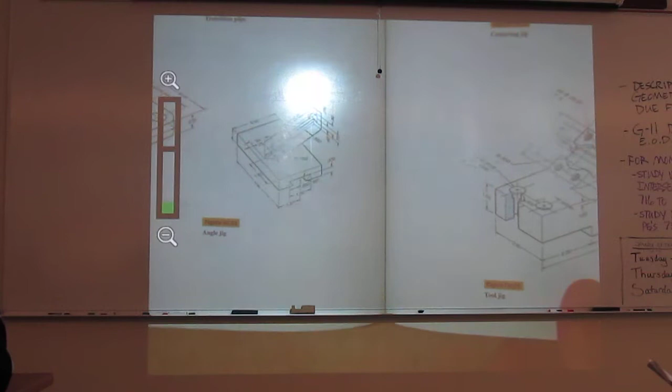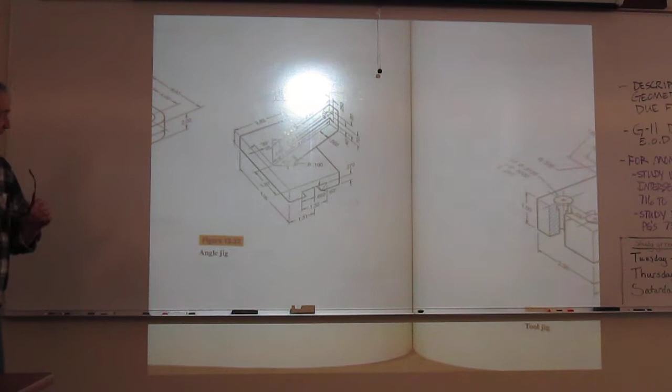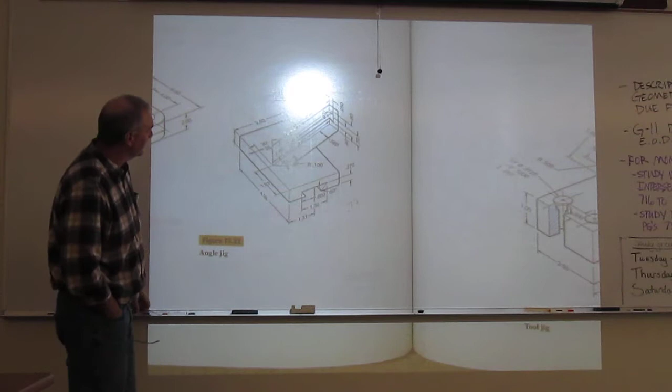A couple things about the object. First off, this dimension right here for the height of this guy is given, kind of hard to see, there's like a little 75 right in here. Is that right? I can't see it at all. We got a glare going from that window over there. Okay. Anyway, this is 0.75 high.

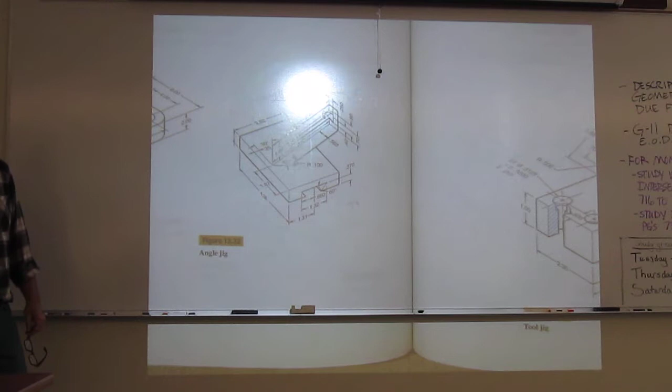Now, the thing you gotta figure out with this guy is where you're gonna pick your front view, because you can choose a lot of different things. If you pick like this or this, where I'm looking perpendicular to these faces, then orthographic projection is going to do a great job on this base. It's going to totally describe the whole thing. But then the top piece is all oblique. In fact, well, it's inclined and oblique.

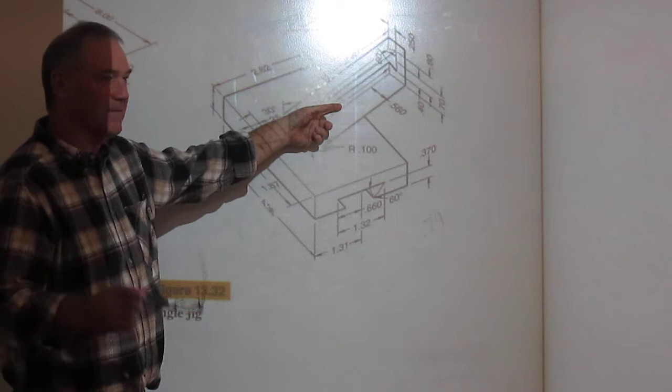If you decide, well, I'm going to look at it like here because I want this true size and shape, and I choose that for my view, orthographic projection again would do a great job now describing the top. The bottom's now all oblique. So you got to make a choice.

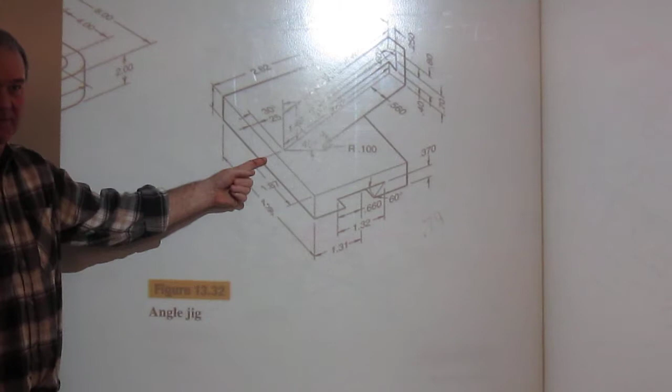I chose this for my front just because I figure this is a base, it's a stand, looks like it slides over some device to hold it. This is probably the bottom, how it runs in production. That's the only reason I chose that. You can choose a variety. So I chose here. That does a great job on the base. The problem is, this is all oblique.

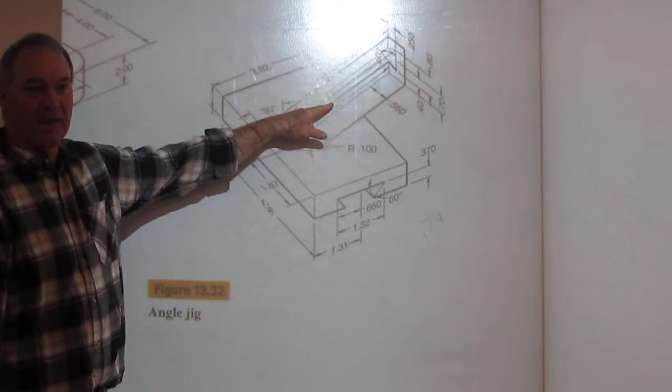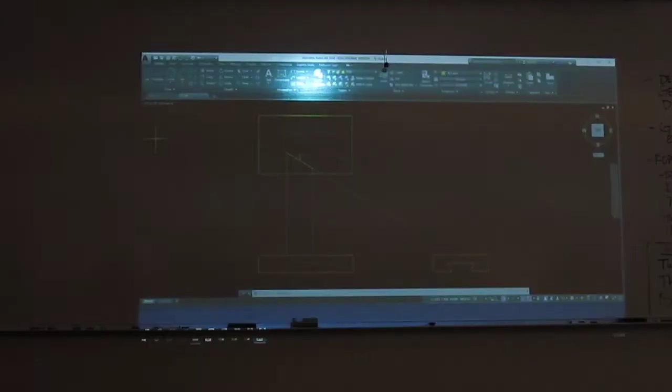How do we tie the two together so that I can draw this in its same space? The trick is really understanding what's true length and what isn't. Remember, when you get those obliques or inclines, we look for edges and true length lines. Okay, let me go to the projection. Here's my front, top, and right side view. Now, the base here is all done.

I've described everything. Now I'm getting ready to tie the top, and the thing to remember is that base sits and comes back here, but then it's also tilted up. But they do give you this line. That line's sitting right here. Now I've got a fold line in between these two views. Is this line parallel to that fold line? Yes, it is. Therefore, it's true length.

That line is also common to the plane of the object. So there's your rotation angle right there, because that's law 1 on that front face. Then I can apply law 2 and law 3. Now, what you want to do is set up your fold lines. Here's the one in between here. Then I set this one perpendicular to my true length line. Now I need to go back to the view in the book.

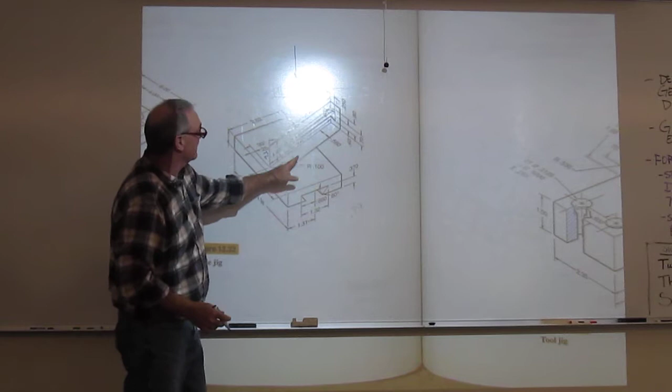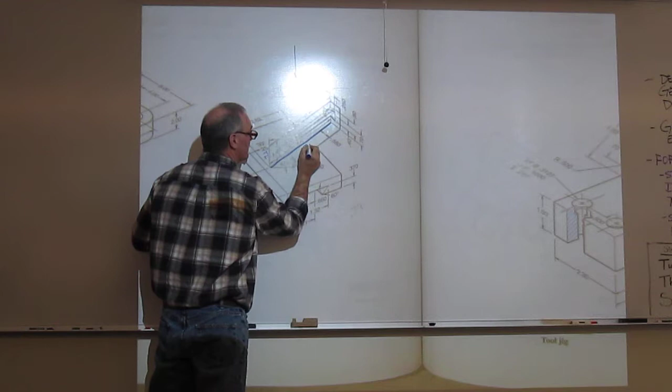I want you to focus on the top view. I'm looking straight down, and I know this is my true length line right here. That's the only line you can really find. You can't find this back until you draw this. Now, looking straight down at this true length line, I also see this as an edge, right there on that edge when I do my top view.

Because it's been rotated back that 30 degrees, you'll see that as an edge. Therefore, this is an inclined plane. This one's oblique. This one's oblique. The back side of it is inclined also. So I got 2 choices. Both of them give me the same rotation.

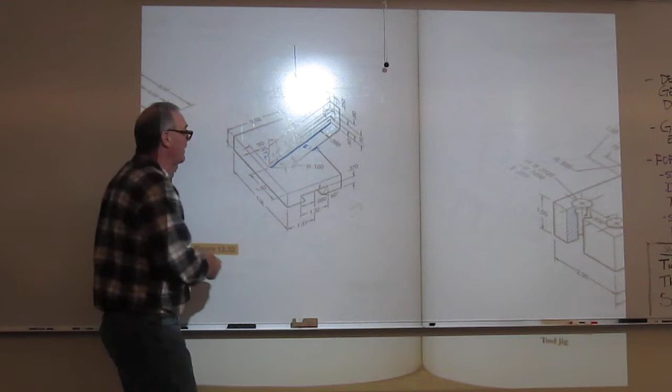Since I'm already on an incline looking from the top view, I can go parallel to that surface, or if I'm dealing with this one, I need to get point view for edge. Either one, they're all tied together at that point. Let me show you how that works. Once you recognize that this is true length and I'm going to get an edge view on my top view, then it starts to fall together.

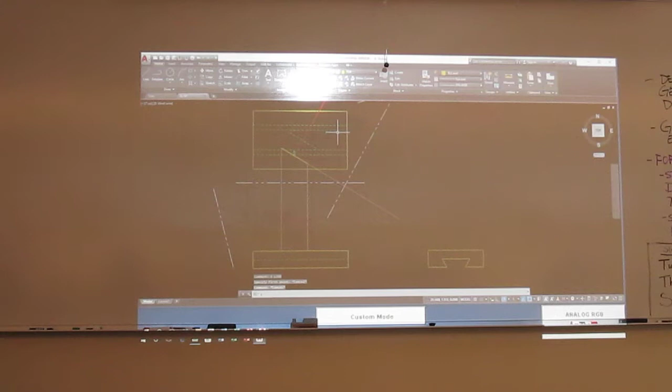So I'll go back to the computer. Because when you draw this, let me just move a line here. Here's my center point.

Okay, there's the edges of that plate. But it's rotated that 30 degrees right here. Now, I see those as edges. Now, this is all foreshortened because it's tilted back 45 degrees too, right? So we just got to recognize that's foreshortened, there's the true length, therefore this is edge, this is an inclined plane. So I'm either doing law 1 on this plane, or I'm doing law 2 for the front plane. Both of them give me this fold line in this location.

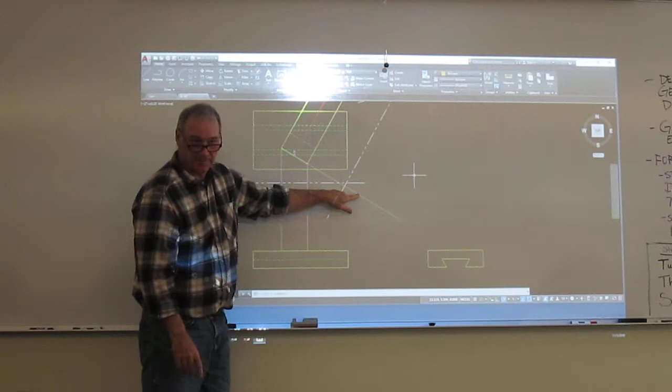Because law 1 states, plane will appear true size and shape in view in plane parallel to it. So if I'm dealing with that edge, it's parallel, I'm going to see this side right here, true length right here, true size. I will also see point view of this line right here. Okay. Now, once you do that, then you have to locate it. And once you get this first one located, because this 45-degree angle is kind of tricky.

Okay. Now, keep in mind that I project perpendicular to my fold line. Now, I know that this line will appear as a point somewhere over here, just I don't know where. Okay, it's going to fall the distance from fold line to point right here, because I always need 2 views to build it. So I'm going to come in here and do an offset from here to there, and offset this one out.

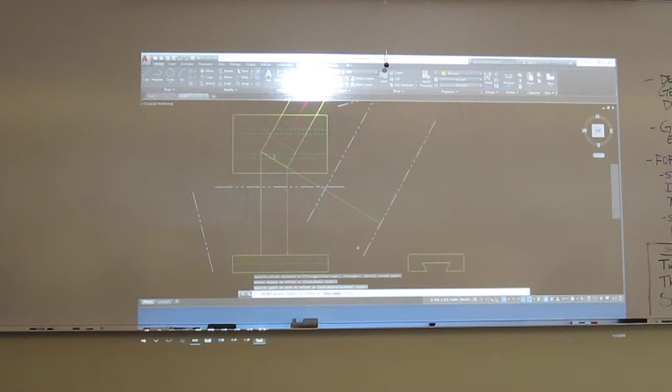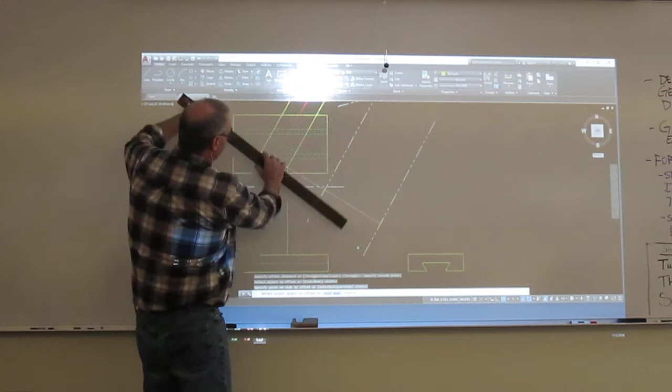So what I just did is I measured distance from fold line to where that point resides. I'm sitting here. And then I'm going to rotate it, and it's going to come back and be right there. So I'm going to see this as a point. Now, the other thing you got to do is get that 45-degree rotation in there. Okay, it kind of helps if you got visual aids on this. Because if it was true size, it'd be there. We'll rotate it back 45.

And then I'm going to rotate to this view. So the thing's going to be sitting like this. So this front edge right here is going to be coming back 45 degrees. Can you see that? If it was straight up and down, it would come straight back? Okay. Well, if it's rotated and I come, it's now in that orientation right there.

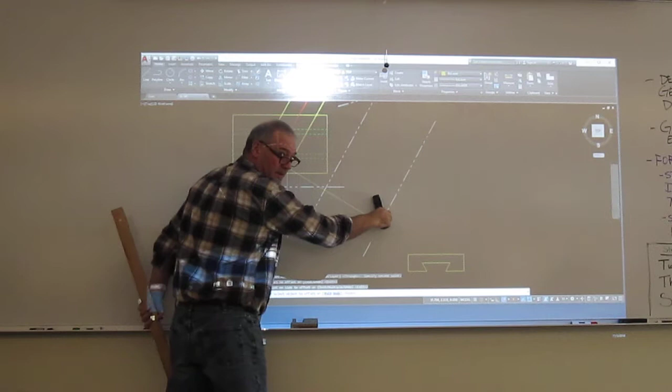Okay. So once I find that first point and I get the rotation angle, it's going to go from here to here, and then let me rotate that 45 degrees. It's going to go on that orientation right there. That's going to be that front edge, which is this one. Now, let me just move this in to kind of speed it up. So that's this view. Okay.

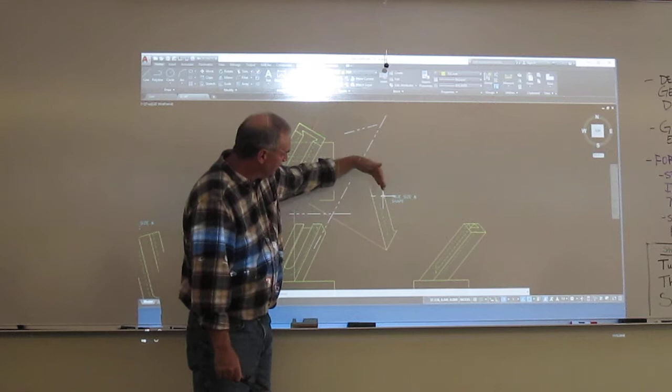Now, once you have that view, you can draw this because it's true size and shape. And you've got this line. Okay. You know the height of it, you know where everything's at, it's all given to you right in the text. So you'll draw this true size and shape. Now, once you do this, notice I now have edge view of the front plane. I've got edge view of the top.

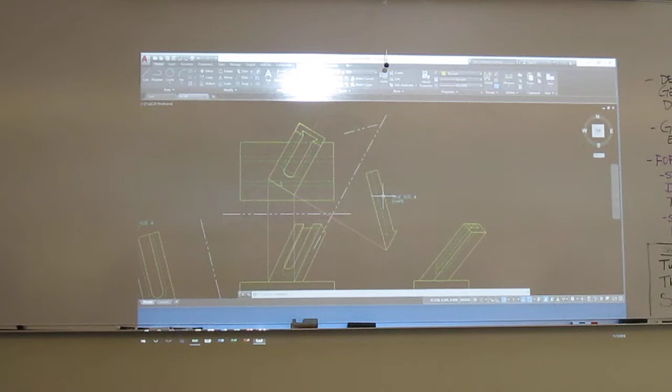To build this view back up, in essence all this stuff, I need to have 2 views, so I've got to either project to the top or to the front. And I did both because I used both of them in different situations. So I've got edge view, there's my fold line, this is true size and shape. Now again, you need to maintain distances.

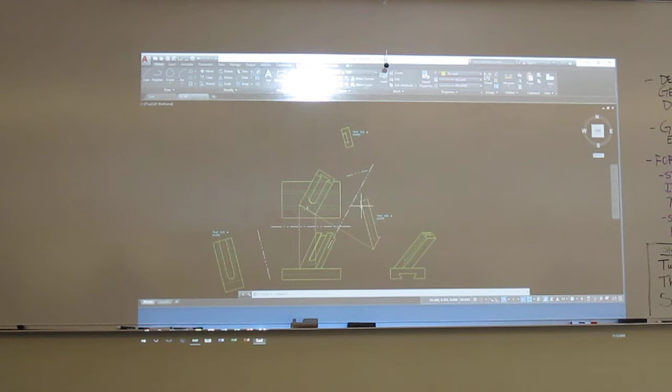So when you set that up, keep in mind you project perpendicular, and then the distance from fold line to point will be fold line to point. I'll show you that just in a second. So that's how I set that one up. And then to do this side, I threw my fold line clear out over here just to get it away from my view.

But again, this line and this line are parallel. Okay, that's law 3. So I'm going to see true size and shape. Now the distance from, again, I need 2 views. I project from this one. This one is fold line to point, fold line to point.

And once you get this, I would recommend, once you do that, go to a reference plane on everything you do when you do reverse construction. Because you've got to build this view, maybe even build that view. But you have to use reverse construction to get these ellipses. Here's where I see the circle.

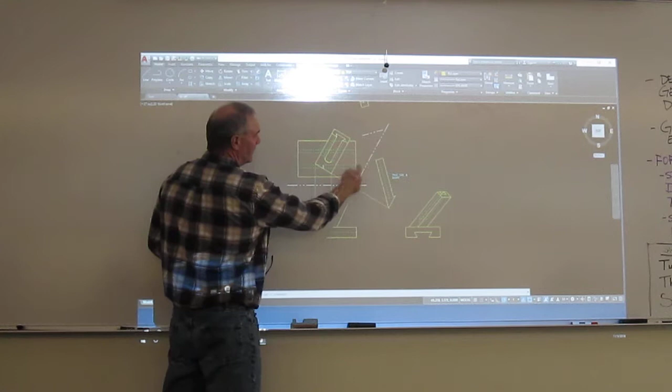So to use a reference plane, it's right there. It's sitting right on this front face. Here it is again, here. And so when I bring the measurements, I don't have to go fold line to point, fold line to point. I can just use reference lines. Okay, it kind of speeds you up quite a bit.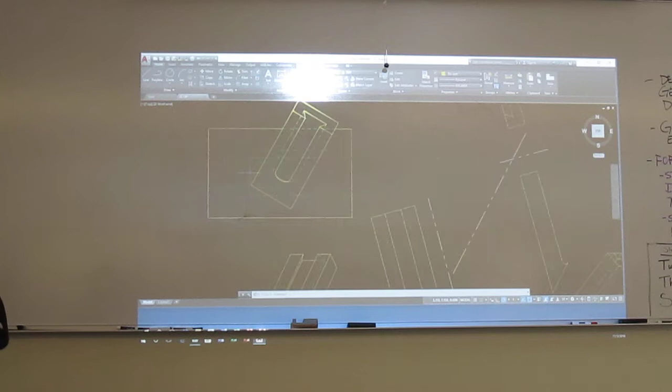Should I show you how I build one of these? That's your setup. Once you get that, you just do a reverse construction back through it. And you end up with something, there's your 3 views. This is not how I really print it. I got another one. I basically take these and create a 3-view on it also. But you can kind of see on my top view, there's that lower track. I see parts of it here, and then it goes away.

Let me just real quickly set this up from my original here, to show you how I do that. We're going to turn on the perpendicular snap. Okay, I got it. So here's where I'm sitting. Set my fold line, there it is. Now I'm going to come perpendicular to this guy. So I'm just going to pick a spot, and perpendicular. Come on, give me an effort. Let me move that to here.

Now I need to draw my fold line. So what I'm going to do is just draw a line that is going to go perpendicular. And this is my fold line. You can put it wherever you want. Now, once you have the fold line for the view you're creating, then you need to make sure that you're using this one to do it. I'm going to slide this out of the way for a second. So there's my fold line.

Now, let's go ahead and do this first one right here. So I know it falls on this line, and it falls in the distance from here to here. So there's that front edge right there. And I'm just going to rotate this thing 45 degrees. There's my front edge. Now at that point, I'm just drawing. Perpendicular. Perpendicular. Move. There. And I think this base is rotated at the same 45. Like such.

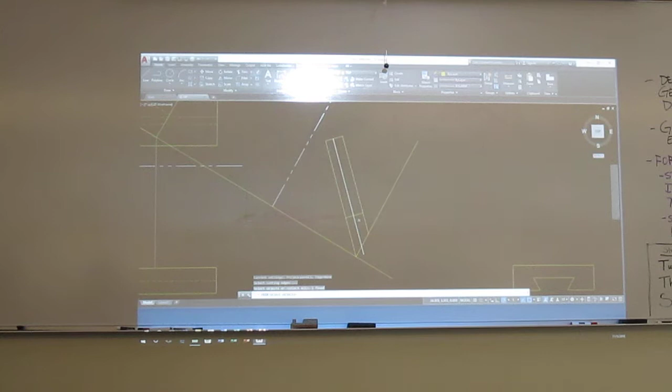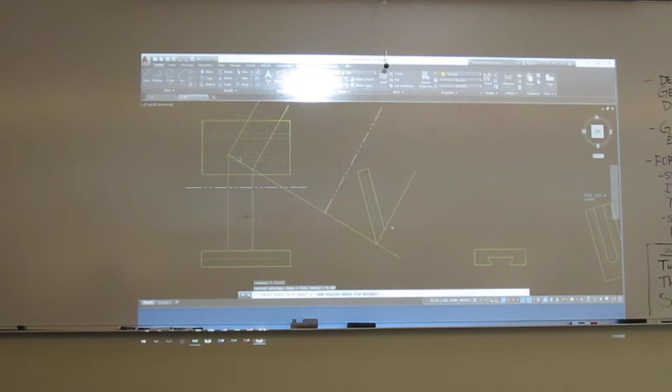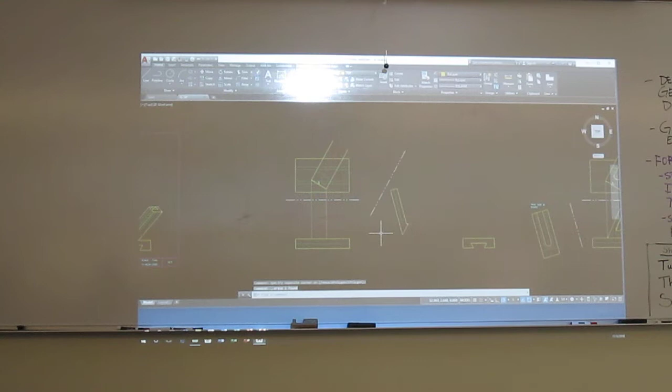Now, we also got a circle on it, but I'm going to add that at the end. Now we got this bottom part filled in. That's got a radius of 1. Trim, no trim. Radius of 1. That's all you need for this one. Okay, so there's the object. So once you have that one, make sure you're saving these fold lines because you're going to be using them.

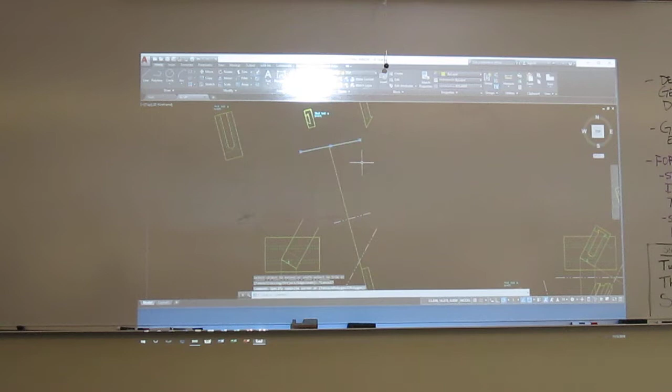Now at this point, let's go ahead and set up the top. So let's do an offset of like 4 units. And let's change that to a fold line. Now I know this line is coming from here, perpendicular, right? And let me just throw a line up here and extend to it. Okay. So I know this thing sits on those 3 lines, right? And in fact, there's another one down here for the fillet. What I don't know is where they fall.

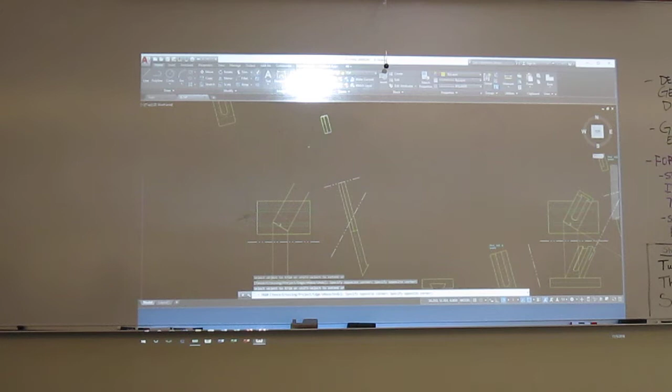Well, they're going to fall fold line to point, will be fold line to point. So I'm going to come in here and offset from here to, can't remember if I forced that to perpendicular. Okay, so there's that one. There's the front edge. Now let's do the back edge. So that's right here. So I'm doing an offset, fold line to point, fold line to point. Okay, there's my 2 edges. And so this guy's going to sit just like this. Okay, so there's basically it.

Now at this point, when I build this, you can use a reference line on this guy too, because you're now true size and shape. So that's got a 60-degree cut, right? I'm looking at that. So I'm going to get some snap lines here, going edge to mid, my offset. And 24.

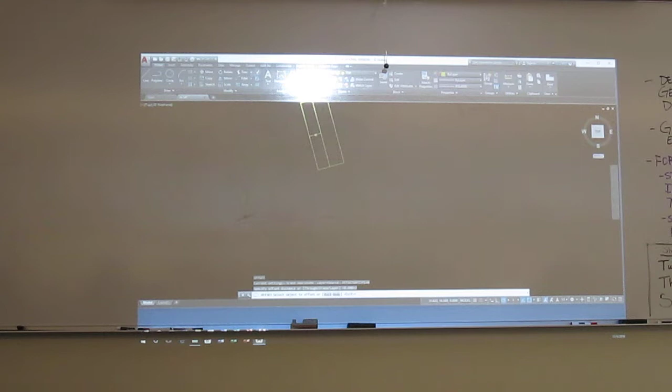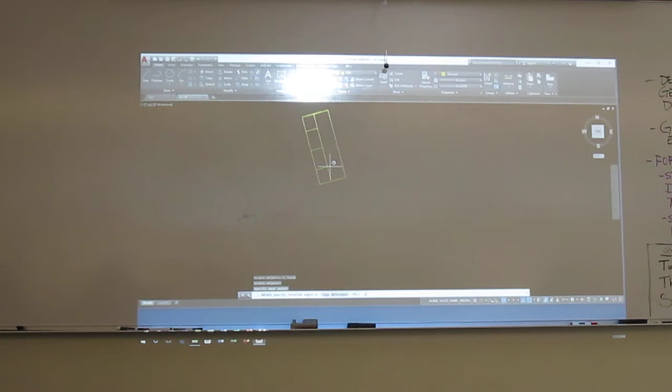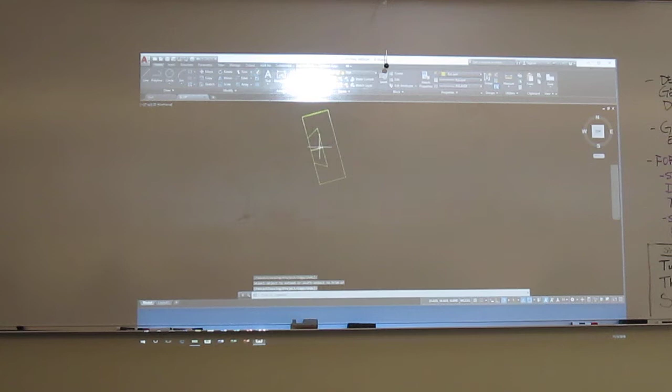That is 24 from the, yeah, that's the bottom trench, right? And then it goes up at 60 degrees from there. And the 60 is what? It's the interior angle, right? Okay, so I need to rotate this line minus 30. That should leave me 60 right there. Do the same on this one. That's 30. Okay, so there's my top view.

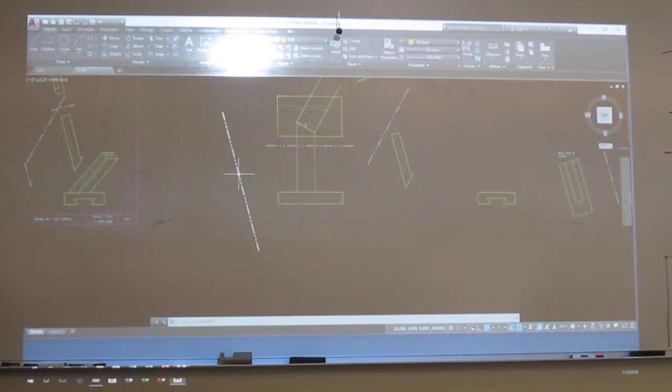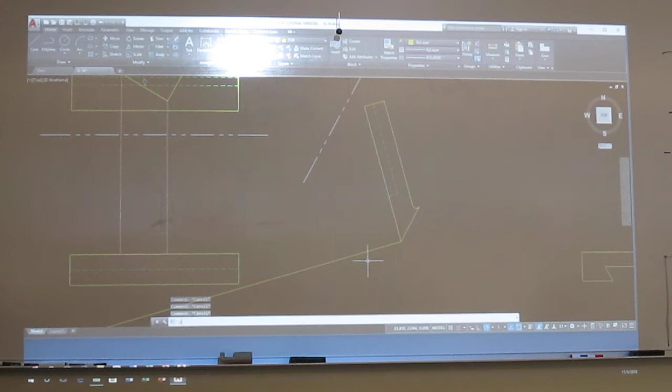So the distance from this front edge to this fold line will be the same as this front edge to that fold line. So first let me project from this view, I'm going to go perpendicular. And again, I got to go past it a ways. So there it is. I'm just going to copy that guy to the top. Come on. It's the computer's fault, not mine. Okay, there's my top and bottom.

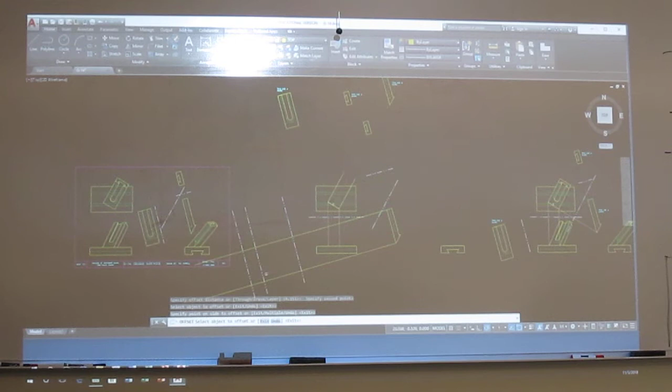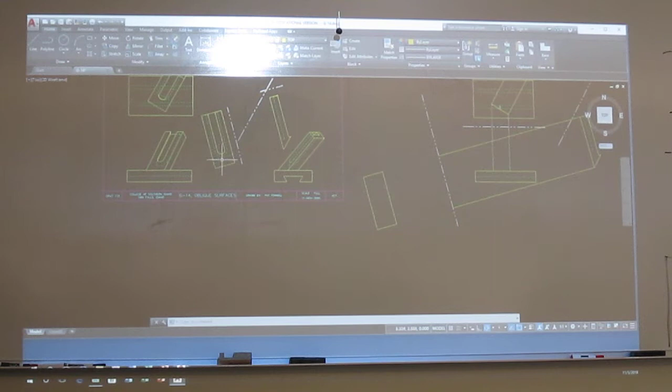Now, where does it actually occur? The distance fold line to point. So I'll do an offset, fold line to point, fold line to point. And then get the back side of it, which is right here, fold line to point, fold line to point. Okay. So this is where the object sits. And then I can go ahead and now draw that front piece on here because this is true size and shape. So you're drawing all of this stuff right on there. So that's kind of the setup.

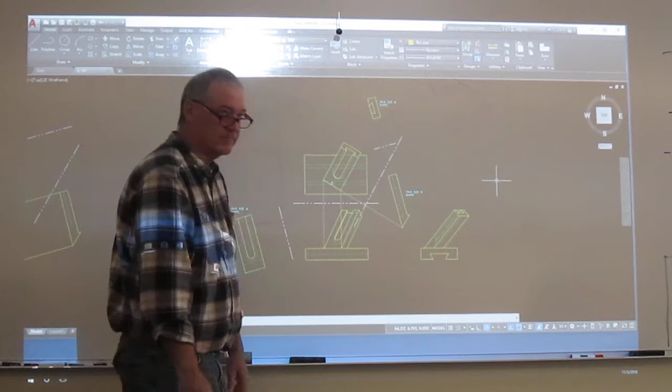And if you choose different, like Gabe, I think you chose yours a little bit different where you went, this is your front, is that correct? It was, and then I tried to do it, and I was using all... Okay. But regardless, yeah, I think this one keeps the front close to you a lot.

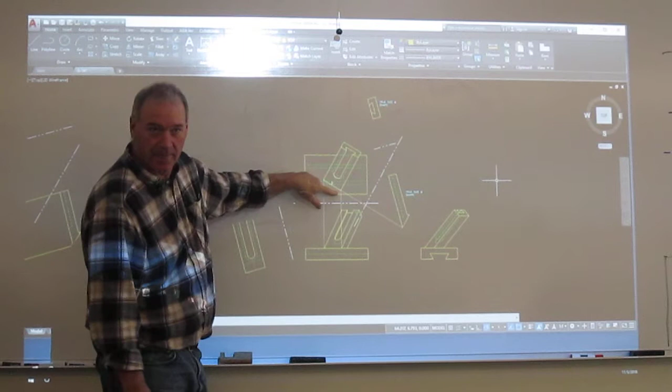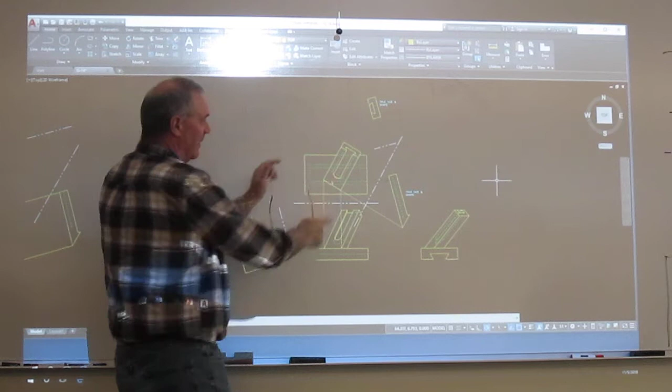Once you get these views set up here in the correct orientation, then you can come back and say, okay, I'm going to build this top view right here. Well, I use this view and this to build the top. I use this and this to build the front. Once I have this view done, then I use this view and this view to build this view, because you always have to have two views. Once I have these two done, then a standard orthographic projection to build this one, where I'm using a miter line to come over and out.

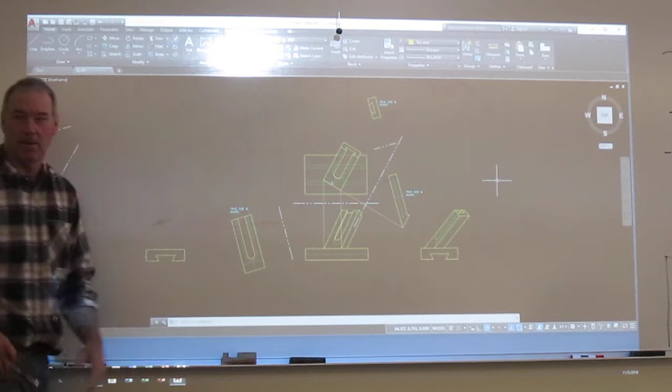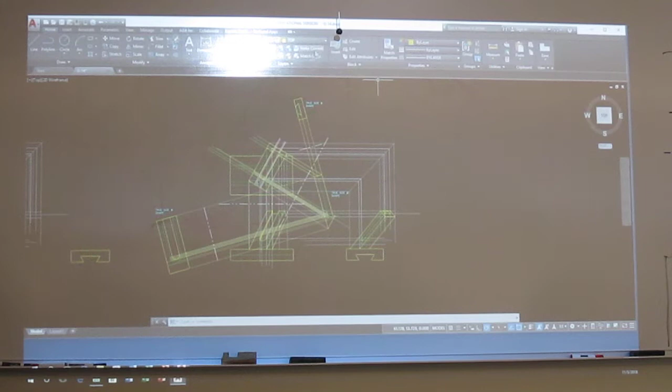And I think I did take time to save all my construction lines on here, which are there if you really want to see all the projection lines. There's a lot of drawing to get this thing correct. Let me actually, I think I segregated it to top. I want to see X here. Okay, so X1, that was setting everything up. And X2, you can kind of see the projection lines here.

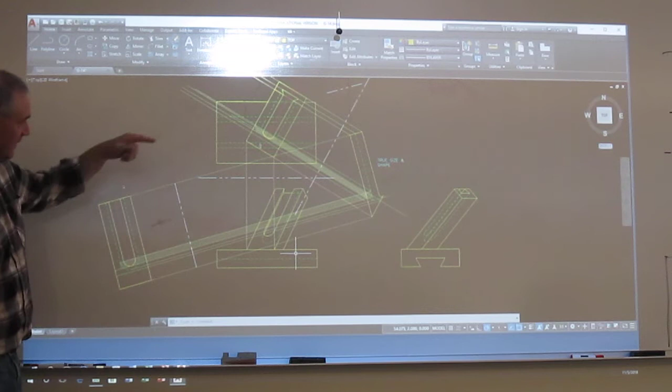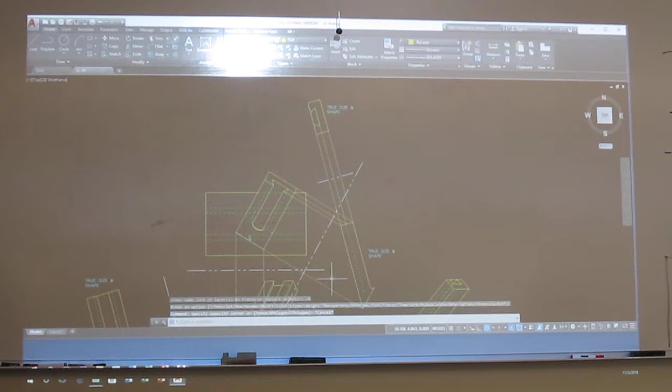Now, the ellipse has changed since I first drew this. I graded this out as an irregular curve. Now you can just take your center and your two axes for the ellipse, so you don't have to project all these lines like I did back in the day. And once you're done with that one, then you're building this guy right here. And once you've got that, then we're coming to this guy. So these are just projected straight down and across, and you can build it.

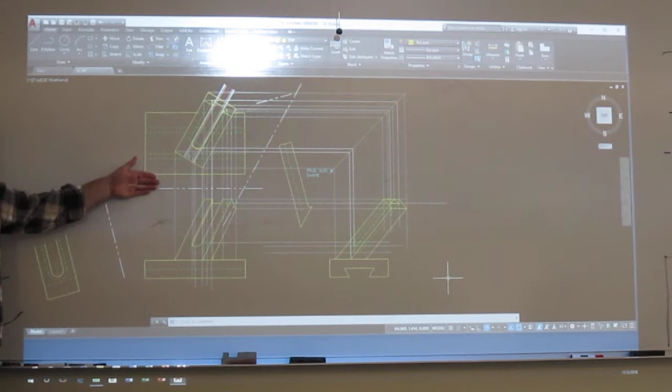Okay, so that's the setup. If you get on that, I think you're a long ways to having a successful completion. Tomorrow, because we're coming up on lunch, that's to get you set up. Does anybody have any questions on how to set the object up? Okay. Tomorrow I'll run through with all these set up and show you how I build this view and then use these two to build this view. So for now, try and get it set up if you want to take this. Like I said, I'll give you 1 extra credit for just trying it. I'll give you 3 if you get it right.